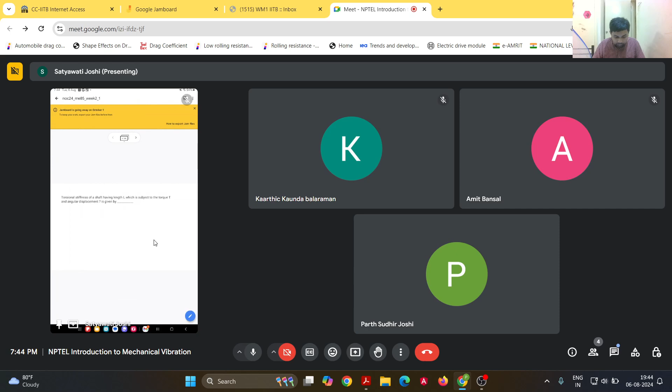So I am basically using a tool called Google Jamboard, by which I can basically draw things and use it like a blackboard or whiteboard. So I have basically listed down some questions, so we can try to solve them together. So the first question is,

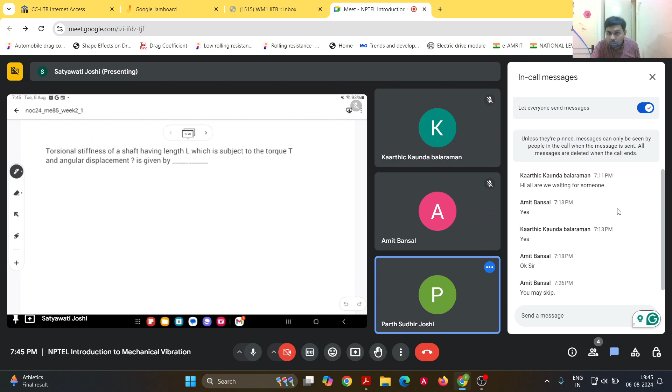the torsional stiffness of a shaft having a length L, which is subjected to the torque T and angular displacement theta. So let us say the angular displacement is theta and torque is T.

So how do we basically define the stiffness? What is the torsional stiffness? How is it defined? Yeah, so it is basically T by theta itself. So what is generally the expression for this torsional stiffness?

Sir, like we have spring stiffness K is equal to F upon X. In the same line, we can define for the shaft also. Force will be replaced by torque, and displacement will be replaced by the angular value. Correct. So depending on the material of the shaft and the geometry, given a certain shaft which has a certain length and diameter, how do you estimate its torsional stiffness? What is the expression for that?

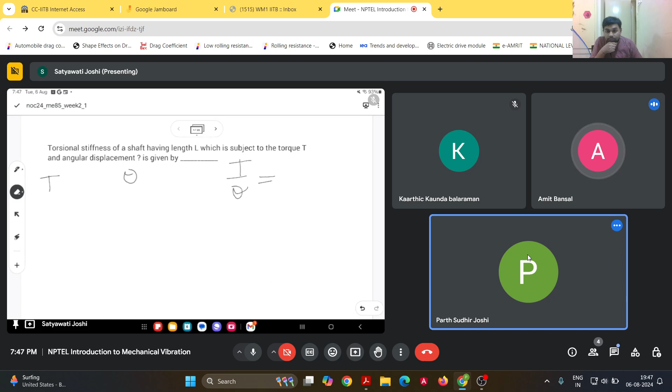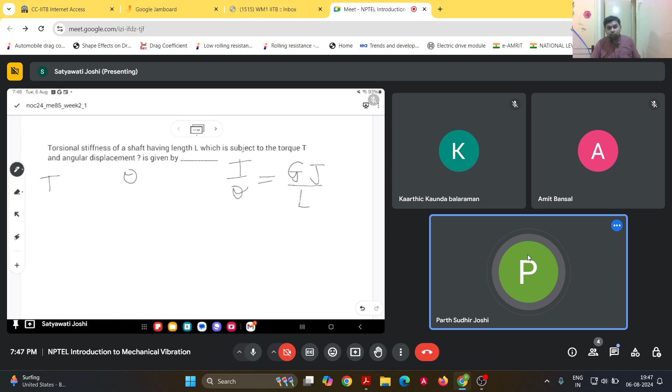So torque by theta. Sorry, it is G into J upon L, sir. Right. So it is G into J by L. So what is G? Sir, shear modulus of elasticity. And what is J? Sir, polar moment of inertia of the circular section. Correct. So it depends on the modulus of rigidity or shear modulus of the material, the polar moment of inertia and the length. So yeah, you're right.

So we'll be starting with some basic questions and then we'll move on to more complicated problems. So there is a certain equation of motion given here: 4x double dot plus 64x is equal to 0. So then what is the natural frequency of this system?

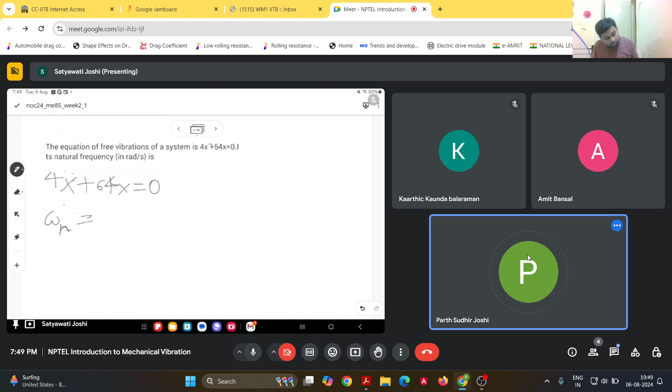Four radian per second. Okay, right. So basically we can compare it with the form of equation, so then omega n square will be 16. So that is why omega n will be 4. So you're right.

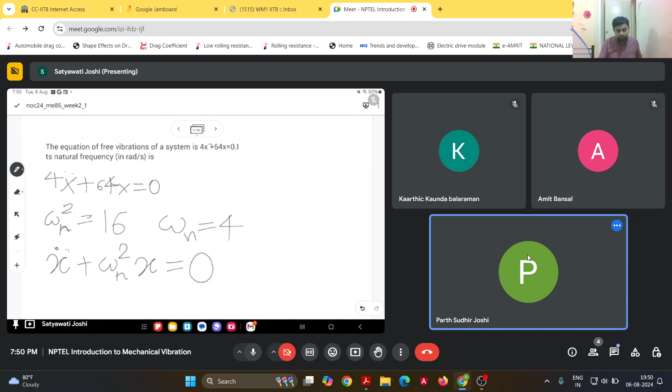So then we come to the next question. In Coulomb damping, the amplitude of the motion is reduced in each cycle by how much? Answering this question needs some understanding of how Coulomb damping actually behaves. You may be directly able to get the answer if you memorize this, but I would recommend that we try to get a better understanding of how this actually comes out.

So maybe I'll give you 2 minutes to think about how to solve this problem. Okay.

Now using the formula a square minus b square is equal to a minus b into a plus b, right? Sorry. So therefore we can use this. So x naught square minus x1 square is basically x naught minus x1 into x naught plus x1. And on the right hand side we have x naught plus x1. So it will basically get cancelled. And we will be left with half k x naught minus x1, right? So k by 2 into x naught plus x1 is equal to mu mg, or if we take it to the other side, it will be 2 mu mg by k, and now x1 plus x2 will be 2 mu mg by k.

So will there be a minus sign between x0 and x1? Sorry, please see equation number 3, x0 plus x1, sir. Right. Correct. It will be x0 minus x1 and here x1 minus x2, sorry. Yes, sir. Right. So now what we have to do is add these two equations. What we want is x naught minus x2, because that is the reduction in the amplitude. If we add these two equations, it will be x naught minus x1 plus x1, so x1 will get cancelled, minus x2. So we will be left with x naught minus x2, right?

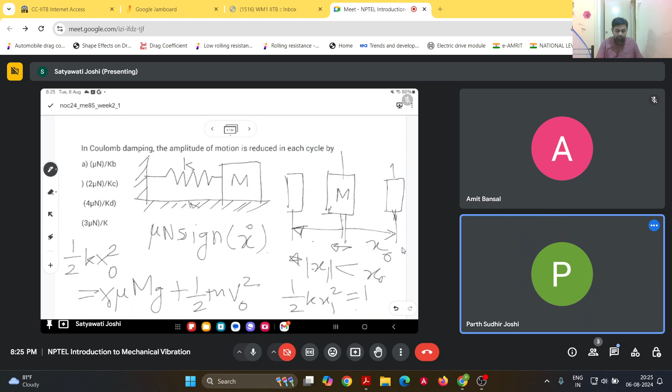Yeah. So are there any further questions? Yes, sir. Please proceed, sir. Okay, fine. So then let's move on to the next question.

So, as compared to the natural frequency of a simple pendulum on Earth, its natural frequency on the moon will be what? We know that acceleration due to gravity on the moon is 1/6 of that on the Earth, right? So g_E is basically the acceleration due to gravity on Earth. For the moon it is 1/6 of that.

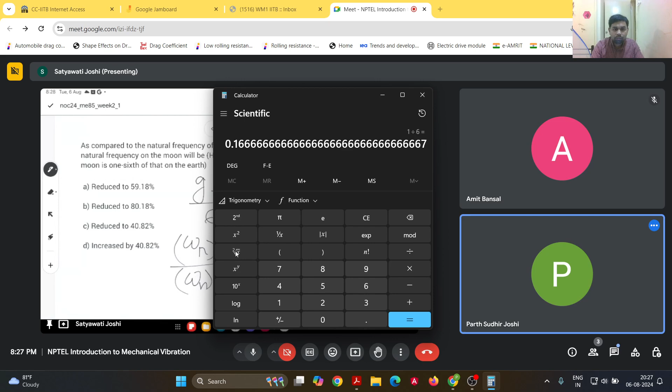So what is the value of this factor? 1 by root 6. Sir, 0.4. Yeah, so it's 0.4082. So that becomes 0.4082 times that of the Earth. In terms of percentage, it will be reduced to 40.82%. So the natural frequency will be reduced to 40.82%. Got it? Yes, sir.

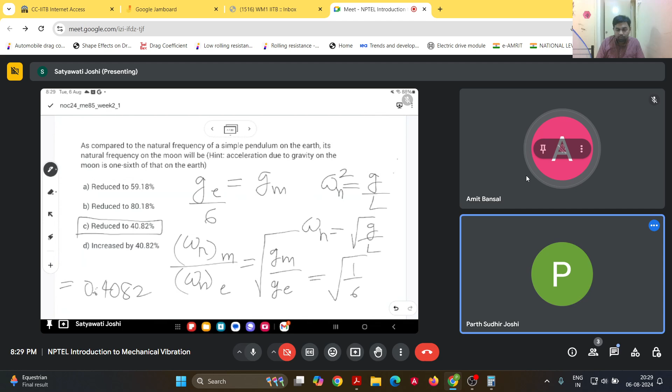So let's start with a new question. This is a question which appeared in the GATE 2020 mechanical engineering paper.

So are you aware of the GATE exam? Yes, sir. Okay. So are you planning to prepare for it by any chance? Sir, I have already completed MTech, sir. Oh, I'm sorry. Okay, fine. So you have completed MTech. So you must have appeared for GATE and you must be familiar with what GATE is exactly.

So this problem is about a mass m1 which is moving with a velocity v naught and strikes another mass m2. The surface is frictionless, it is given, and both the masses stick together and jointly move a distance of 1 meter further along the same surface, and they touch the massless buffer that is connected to the rigid vertical wall by means of a linear spring. The spring constant is given. So the masses will collide and stick to each other, acquire a new velocity, and with that kinetic energy they will cause a compression of the spring.

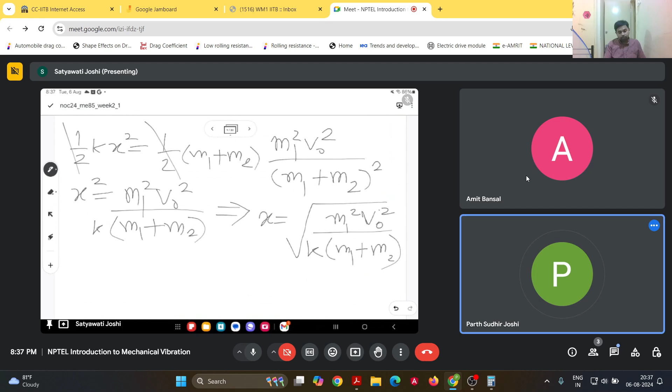So from that we can solve for x. So it will be basically root of, so you can substitute the values of the masses and the initial velocity and then solve for that. So k is 10 to the power 5, m1 is 10 and m2 is 30. So v naught is 2.

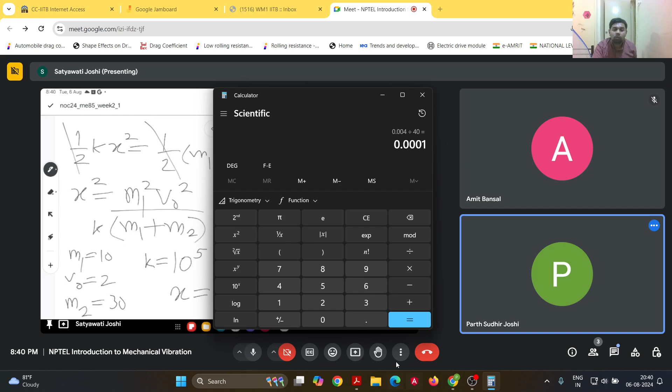So what is the value of x that you get? 11.18 mm. Okay. So, okay, I am getting, just a minute. So I am getting it as 10 mm. So I think with, so just check your calculation. So it's just a calculation, whatever it is. So I got it as 10 mm.

So that's all for this problem. So any questions on this? So shall we move to the next problem? Sir, this 1 meter data is, I think, no use for this problem, sir. Yeah, it's of no use. So the distance actually does not make a difference because there is no friction. So if there was friction, then it does matter. Yeah.

Yeah. So this is the system shown over here.

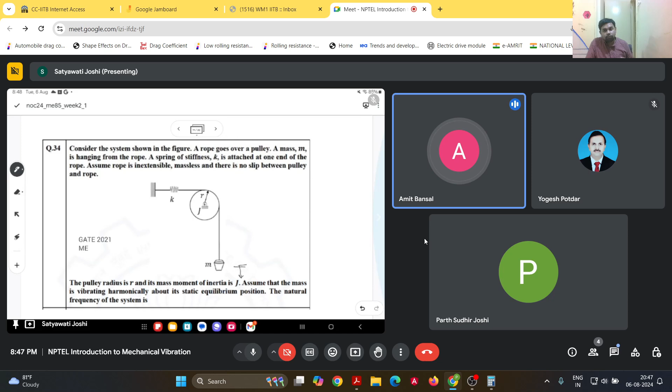Sir, one approach is that we can find the moment of the forces about the center of the pulley. Right. This is a standard approach we generally follow in these types of problems, sir. Right.

Like this mass is acting as a force, mx double dot. So it is generating a moment about the center of the pulley, mx double dot into r. Similarly, this spring force, we can take the moment of this spring force about the same center. Similarly, in case of this pulley, which is the extra component here, this can be modeled as J into theta double dot, and the sum of all the moments will be zero if the system is under equilibrium.

Yeah, broadly, I think you are correct. First of all, the system is not in equilibrium, so it will be oscillating. So that sum of moments may not be zero. Because the pulley has a certain mass, it will again be accelerating, so it will not be in equilibrium. Because of the acceleration, because it is not massless, the tension on the two sides of the pulley will become different. If the pulley was massless, the tension on both sides, the spring side and the mass side, would have been equal.

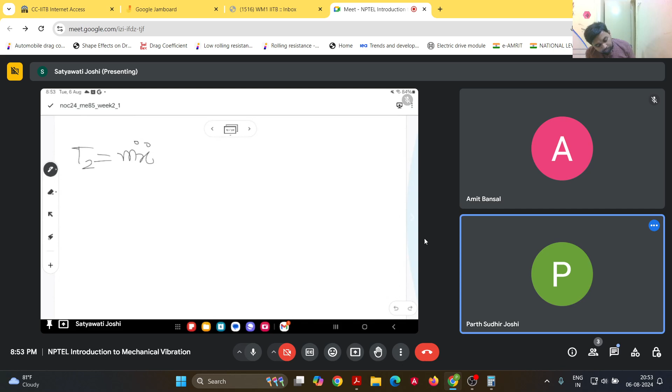m x double dot. T1 is already kx. So for the pulley, as you said, we'll write the moment equation. The net moment acting about the center of mass will be T1 into the radius minus T2 into the radius, because T1 is causing an anti-clockwise movement and T2 is causing the clockwise movement. So that will be J theta double dot.

Right. So now theta double dot and x double dot, are they related? Yes, sir. So how are they related? Sir, for small angular displacement of a pulley, we can write that x is equal to r theta. Yeah, right, that is correct. It's not only for small angular displacement, it is mainly because of rolling without slipping.

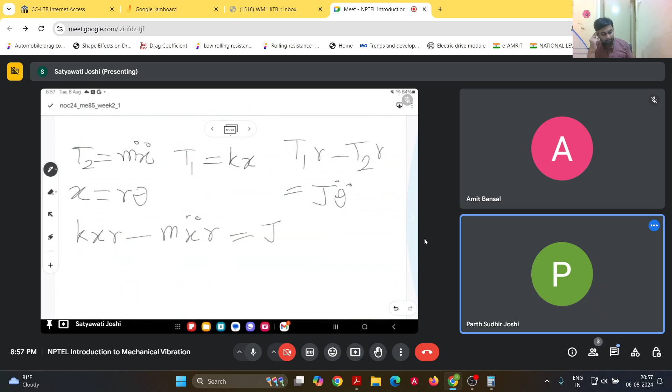So now there is a slight sign convention issue in this. When x is positive, or basically if we are moving it downwards, then the cylinder is turning clockwise, and if we are moving upwards, then the cylinder will turn anti-clockwise. So we just also need to take care of that.

So kx is equal to, so that's the equation of motion. And the natural frequency will be basically root of k upon m plus J by r square.

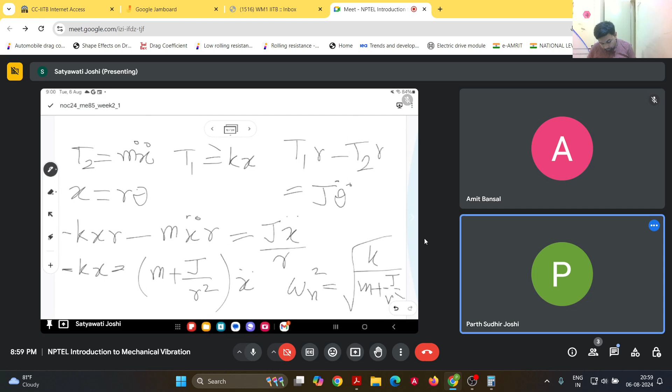So that's all that I had from my side. Any other questions? There are also some more problems which I have listed down, but I think we are almost out of time. So any other questions from your side? Maybe we can also discuss this one more problem. I think this is simple.

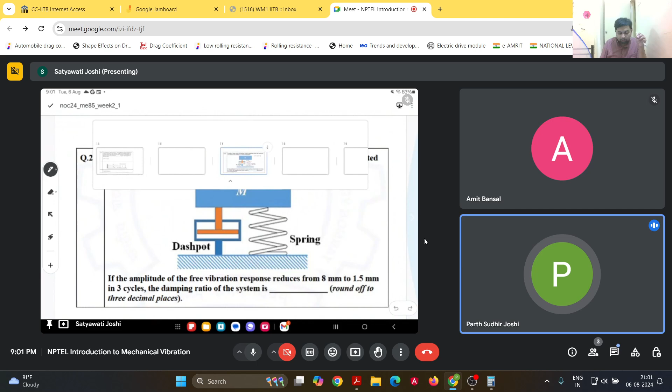Sir, can you share these problems? We can solve later on, sir. Yeah, that is also possible. I can share these problems. This was also asked in GATE 2023. Likewise, there is another problem which was asked in a previous GATE exam. So you can also try to solve these problems on your own. I'll share the list of problems also.

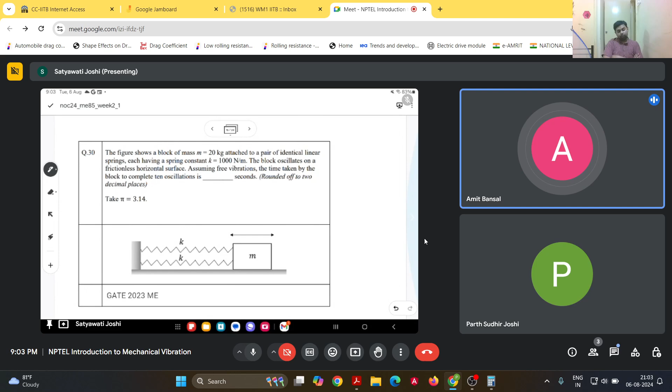Right. So is there any particular thing you think we need to understand in the problems we have covered so far? Do I need to add more explanation of why what is happening? Yes sir, the question solving approach is okay. But what I expect is that our focus should be a little more on how we can model a given real problem into these types of mathematical models.

Right. So then we can do one thing. My request is that at least half an hour we should devote to how we can solve real time problems. One person is from industry, I am from teaching. At least 10 to 20% time we can devote to learning conceptually how real time problems can be taken on paper and solved in research laboratories.

Right, sure. So what we can do is, these are very closed-ended problems that we are discussing right now. There is a very specific question, and it has one specific answer. Real life problems will not be like that, you don't even know. You're right.

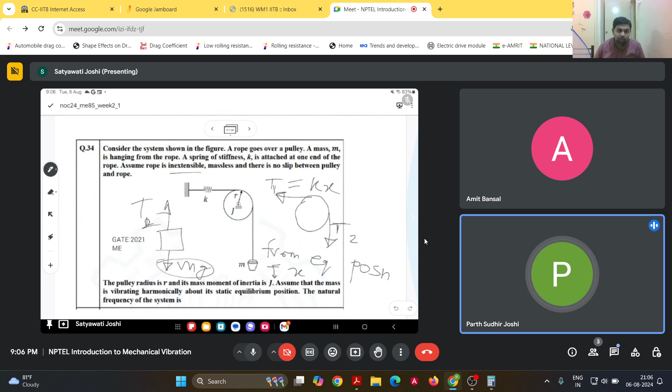Yeah, I think then we can end today's session over here, and I'll share the problem sheets with you, and you can try them and let me know if you are able to solve them, and if you have any questions you can let me know. So thanks for joining.

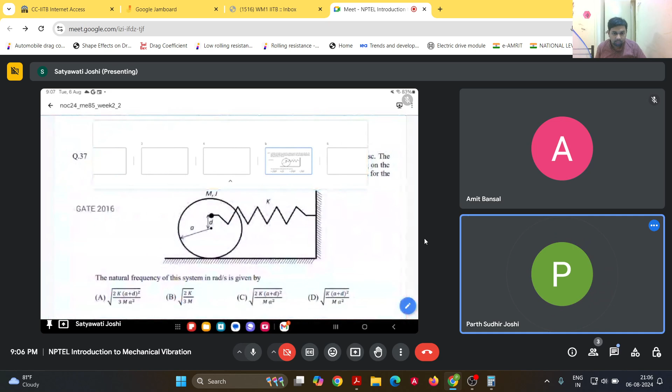Then there is another sheet which I had also prepared similarly, which had questions from the GATE exam. So these kind of problems I had. You can try these and just let me know whether you are able to solve them. Yes, sir. If required, I can find these questions from the previous year GATE examinations. Sure, I have already done that exercise for you, so you can try these questions right away. You can also find them on your own, no problem.

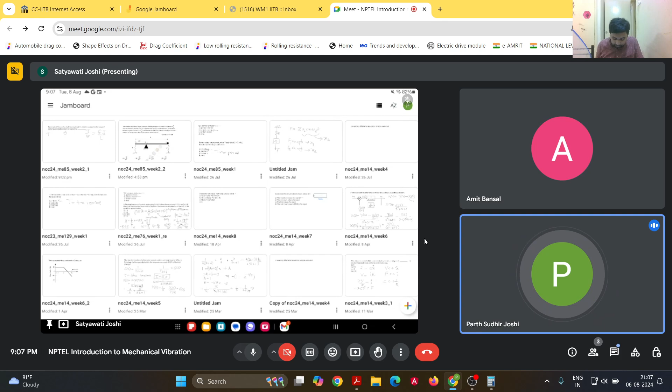And sir, there is one more request. Can I know who is handling the discussion forum, sir? I do not know the person exactly. What was the issue, any particular issue there? Because many times, sir, we face some problem either solving the assignment or in learning the concept. So we put our query on the discussion forum, but the response is not encouraging. Either they do not reply or reply too late, sir.

Because every assignment has a deadline. For the first and second assignment, the deadline is tomorrow, sir. So some queries are to be answered at the right time, otherwise we will miss the deadline. So I request through you, sir, if you can convey our message that the queries raised by the participants should be addressed at the right time.

Okay. So what I can do is, first of all, I can also try to go through that discussion forum, and if I am allowed to, I can also try to answer them there itself. And I'll also try to find out who is handling it. Generally what happens is there are other TAs who handle these things. Yes, sir, that is the problem. So maybe we'll have to find out.

But anyway, if you have any questions, you can always ask me during the live session. Yes, sir, I will ask. No problem, sir. And regarding the questions on the discussion forum, I'll also go through them and try to answer them based on my knowledge. So thanks for pointing that out.